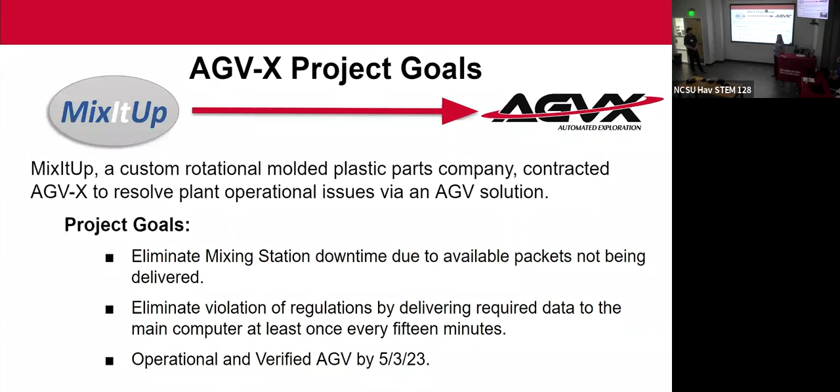And if you reviewed it and everything and you have certain questions relating to specific ones, just let us know. So now I'll just pass it off to Luke. I didn't mean to steal your thunder. Yeah, good job rolling with it. I've been in your spot many times, had to do that. It's always good to have it in case there's new people or whatever, and then be quick to jump. The seniors are talking about that right now because they've got some new people at their design next week.

Very good. So what we'll show you first then is a comparison of the design we presented at concept on the left, and then the design that we have now with our modifications and updates. The width is the same, the length is the same. We had a slight height increase, but the layout is all the same between the two.

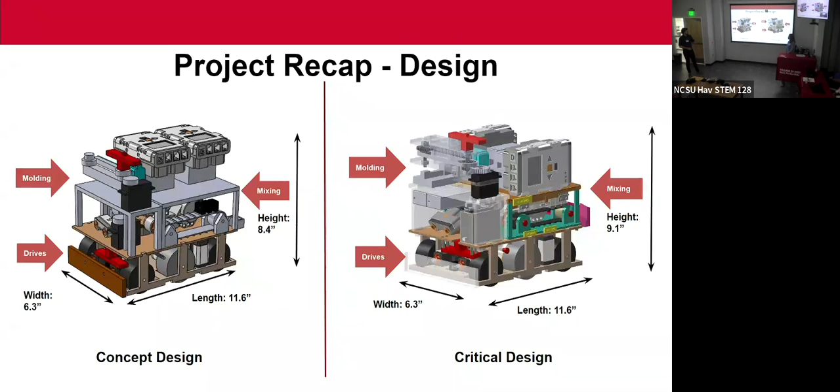I think one major change that you can see was just orienting some of the stuff on top a little bit differently. It helped with some weight distribution and cable management. Still within the overall height requirement. Yes, sir. And we'll cover all the changes that we made in detail as we go through the presentation.

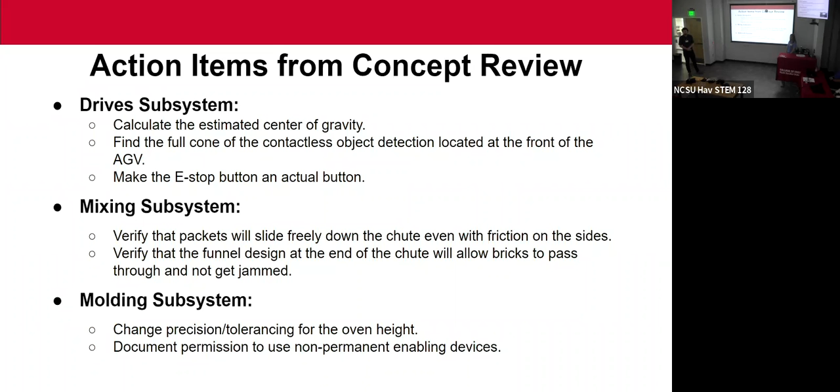These are the action items that we took from your concerns from concept. We allocated those to our subsystems, and as we go through our subsystem designs, we'll address how we implemented changes to address these concerns. Did we miss any action items that you can think of? Very good. So I'm going to hand it over to the drive subsystem, and they will explain their design. Thank you, Luke.

My name is Nicholas Conner. With me, I have Gavin Ehrhart and Bethany Lier. We are the drive subsystem. Our need statement was that we should provide a method of safely maneuvering the AGV around the plant, which would allow for the other subsystems to perform their required tasks. This is an overview of our subsystem and the components we used.

On the front here, there are two LEGO touch sensors. This is part of our secondary object detection with the bumper. We also have another touch sensor located right here, that is our emergency stop button. As y'all requested last time, we have added a button onto the end of that so that we don't have a rod that might injure any users.

For part of our primary object detection, we have the Sumo eyes located right here, the red object. Combined with that, we have the LEGO ultrasonic sensor on top. Gavin will cover why we have two of those, but those are primary object detection.

On the back left side, this component right here, that is our HiTechnic color sensor. This is used in identifying all the different cells around the plant. We also use it in the mixing cell to notify the code when we need to stop for the positioning.

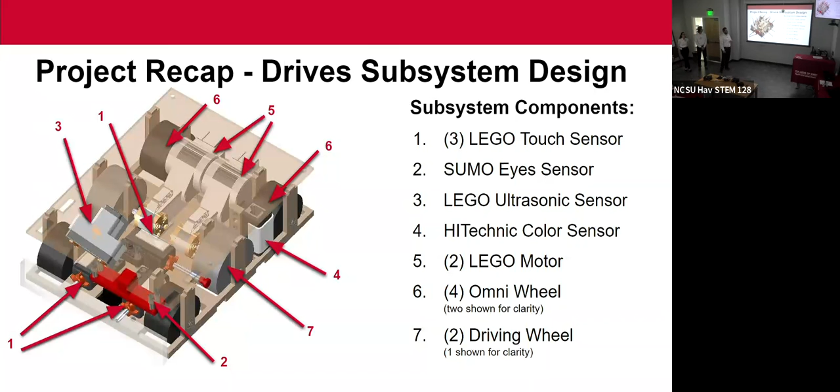Is that the wheel right there? Yes, sir. This one, if anybody wants to look at it. And then, as I stated, we have our two drive wheels, which are located in the center of the AGV in line with those motors.

Recap from our concept review, a couple of things I wanted to point out. For our main driving feature, we were working with the layered base design. With that, we wanted to allow for easy physical interface between the different subsystems. We wanted to lower our center of gravity, so get as much of our weight as we could down to the ground, and give as much height as we could to the other subsystems.

Going into this, we knew that mixing had a height requirement of 4 inches for loading their packets, so we wanted to compact our subsystem as much as we could to give them as much room as they need. The central pivot wheels in the center are our drive wheels. Having that allows us to rotate the AGV off the center of the entire AGV and allows better access to both the front and rear of the AGV.

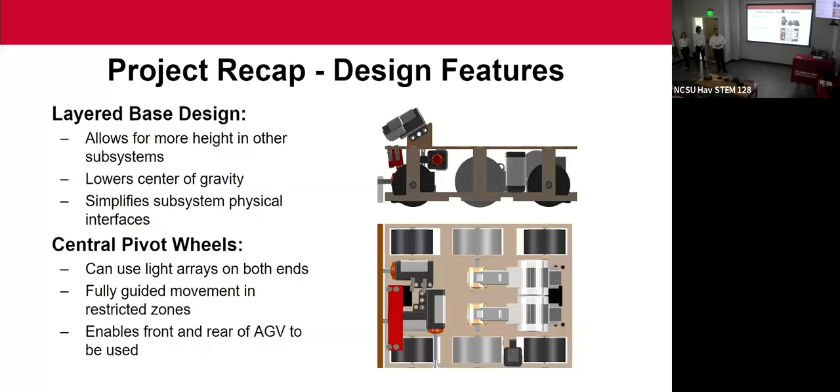From concept review, you wanted the button on that shaft, which I pointed out. There was also the center of gravity analysis and the object detection cones that we did not have fully defined, so we had to find those. Gavin will talk about that in just a minute.

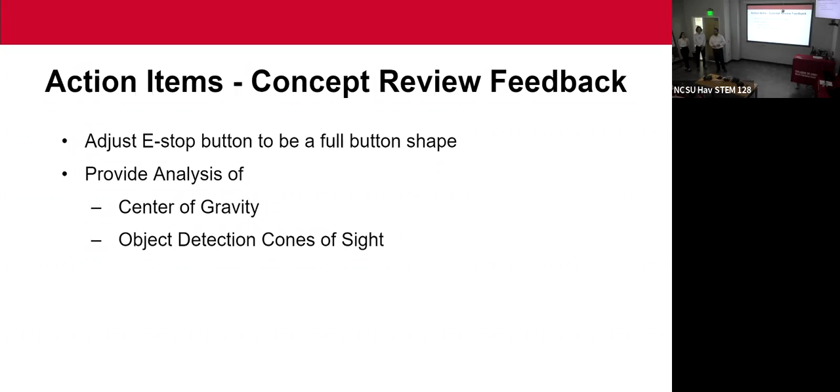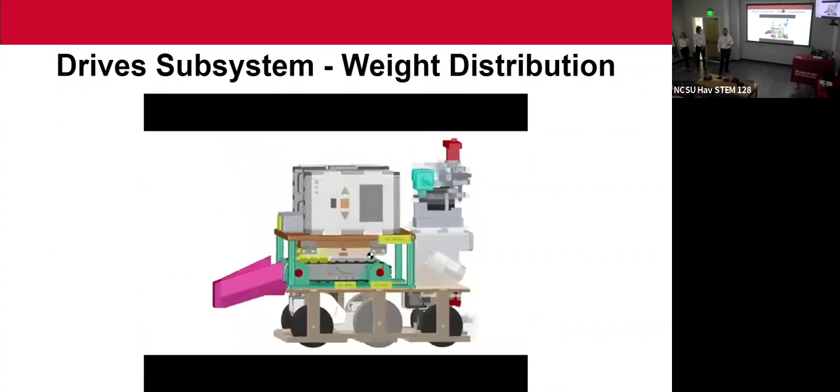Some details we wanted to point out here: between our two components, we have the main base, which is the lower portion, and the vertical components. On the top, this is what we reference as the top plate. In between those, we have a height of 1.84 inches, and all of our components, except the one you see sitting on top, fit inside of that space.

So how high does that make mixing their platform? 2.6 inches from the ground to the very top plate, so they had the rest of that up to 4 inches to work with.

Our subsystem, we have estimated the weight to be 1.1 kilograms, and we will cover later in the slides the allocation of the entire weight that was in our requirements, and we are within what we were allocated for that. For our components, we have 3 that were manufactured here, the rest were purchased parts.

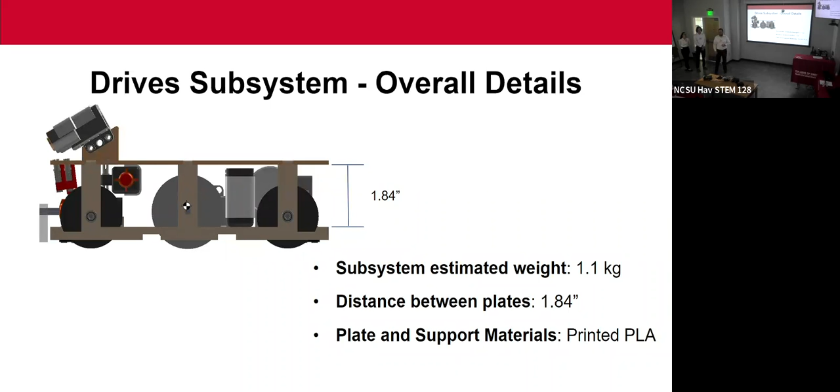As I stated, the base and the top plate are manufactured. We 3D printed those out of PLA material, and we chose to 3D print them due to the complexity of their features. And on the front, right here is our bumper, and Gavin will cover that in his portion.

Here we have our base details and their methods of attachment to allow the molding and mixing subsystems to interface with our AGV. Our team designed the top plate right here that will fit and lock on to the legs protruding from the bottom base structure. They will fit into each of these holes with a tight tolerance.

Here, like Nick said before, is our omnidirectional wheels at each of the corners. They are attached to the base structure with a shaft and bearings in their supports. This helps because the shafts do not grind against the wheels when weight is put on top of the AGV from the mixing or other subsystems.

In the middle, again, is our drive wheels, which are connected to the motors right here in the middle and the outside structure of our base. Again, you use bearings there so that the shafts and axles won't run against the wheel when more weight's on top. Our motors and sensors are all attached to the bottom base except for our primary object detection sensors and our E-stop, which I will show in a minute.

The dimensions, the bottom of the lower plate to the ground is 0.26 inches. And as you can see over here, from each side of our AGV, the center line is 3.15 inches.

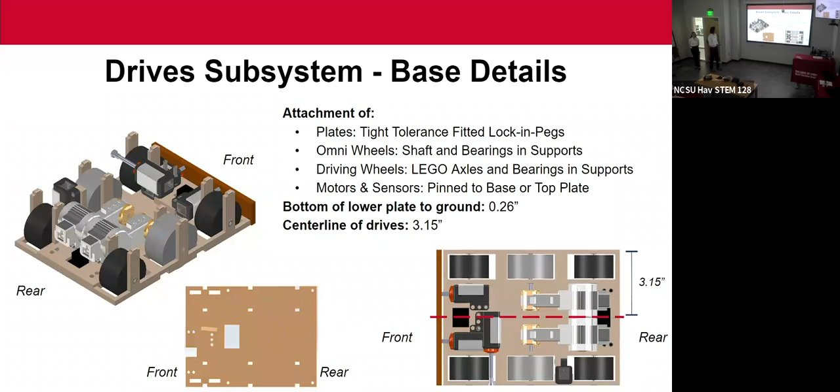Based on the feedback from our last review, you all wanted to see a side view of the cones of detection for our primary object detection sensors. Here on the top you can see our Lego ultrasonic sensor, and beneath that is the sumo eyes, both attached to our top plate.

The requirement is to detect an object and come to a complete stop without contact within 3 inches. Through testing, we found that if the sensors were only pointing straight ahead, they would not pick up at 3 inches. So we had to adjust their angle: for the Lego ultrasonic, we adjusted 30 degrees, and for the sumo eyes, we adjusted 7.5 degrees down.

The attachments are fixed so we don't have to worry about checking and adjusting them throughout. Yes, sir. And as you can see, as part of the requirement too, it detects 3 inches, a quarter of an inch from the ground.

Next, we have our top view of the cones of detection. Here in red, you can see our sumo eyes, and in white or gray, you can see the ultrasonic. Measuring the cone of detection through testing, the sumo eyes can only cover 5.75 inches, whereas the width of our AGV is 6.3 inches.

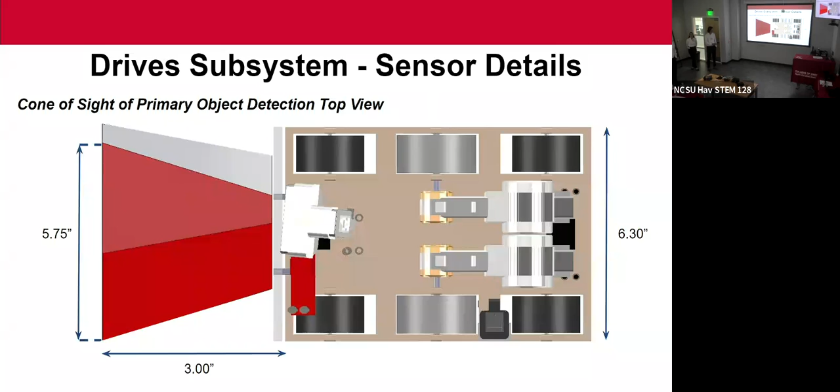Go back to the previous slide. So there was no way to put that sumo sensor where you can actually get to it.

The other problem I see here is the minimum requirement was 3 inches. You never want to unnecessarily force yourself into a minimum requirement. If you can cover beyond 3 inches this way, you want to do that. Right now what you're showing me has pinpoint risk, because if anything is off in one direction, you're not going to meet the 3 inch requirement. You've got plenty of coverage based on the requirements, so I would have pulled that back and said we're covering beyond the 3 inch minimum requirement, so if things move around, we're still covered.

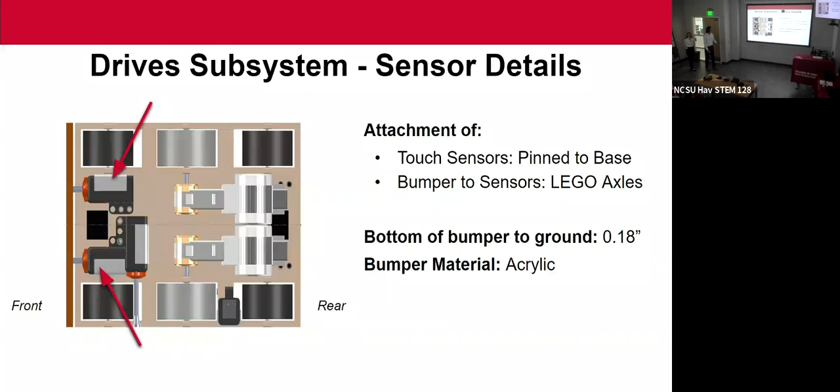And next, I'll be passing the code logic off to Beth.

For the code logic, I'm going to go over a general overview of the whole code altogether, and then I'm going to get a bit more specific into how the entering and exiting of the cell works with a bit of a walkthrough. We do have the pseudocode in the background slides if we had any specific pseudocode we wanted to look at in particular.

So when we turn on the AGV, it'll start by setting up all the sensors and setting our variables to 0. Then we'll message Brick 2 to make sure they're ready to start their day. Then we'll have the prompt for the operator to ask if we're allowed to begin motion. After we get the okay to move, we'll exit the cell and begin following the line, which starts our follow-the-line loop at a set motor speed.

As we go through the loop, we're going to be checking the sensors in a particular order, running it constantly while we're in motion. First, we're checking for an object with either primary or secondary object detection. If either of those is flagged as registering an object, we will stop and do whatever is in the function called for checking the object. For the e-stop, it's the same thing; we'll check if it's been pressed and do whatever runs in there.

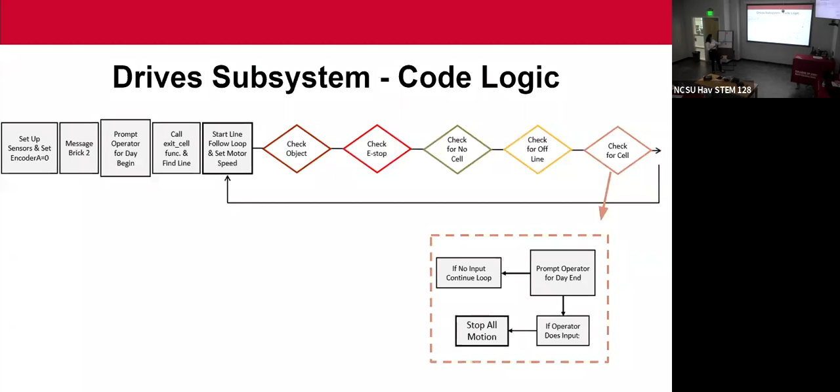Well, it's good, here I could transition into that, a little bit of a walkthrough of how we plan to get in and out of the cells. So I have my AGV model, this is a scale model of our AGV. This is gonna be the front half and the back half. Light array 1 is gonna be the one in the front, and light array 2 is gonna be the one in the back. Those are the references I'll use.

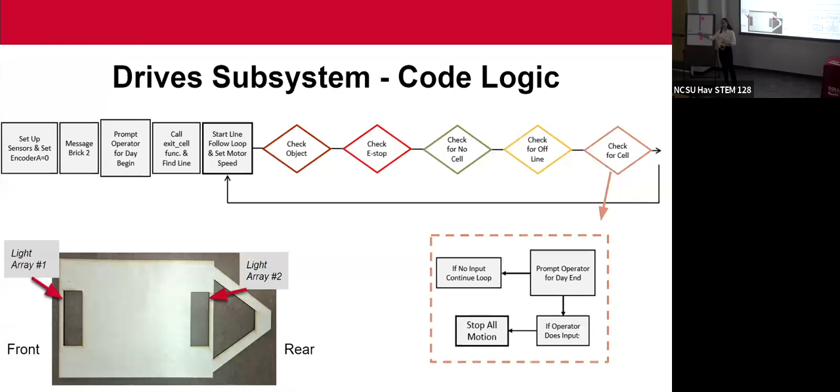So the reason we really wanted to utilize the pivot wheels when turning into the cell is because it would make it really easy to center ourselves if we could pivot easily. So that's why we took a lot of time thinking about how to get in and out of the cell, the enter and exit functions. We also only wanted one function for entering and exiting that changes based on what direction we wanted to go. So as we're coming into the cell, these are the dimensions, this is the restricted section and the aisle. These are figure 2 in the ICD if you wanted to see the actual dimensions. It should be to scale with our AGV box thing that we have.

So as we drive in, the color sensor that is approximately here will see this color space, and it should be lined up with this line. Our center wheels should be lined up with that line. And when it determines whatever direction we need to go based on the color—for example, if we are at the molding or data color—we are going to turn forwards. So we slowly turn until light array 1 is no longer on the line, then go just a little bit further so it's really not on the line. Then we continue turning in that direction and stop when it sees the top line. Then it slowly centers itself and pulls forward until the bumper hits the cell wall of either the molding or the data.

If we're backing in, we'll do the same thing but with light array 2, turning the other direction. So slowly come around until we're off the line, come back around until we get to this line, then back in until the color sensor at the mixing cell is indicated, and then we should be lined up so anybody could do any servicing they need to do at their cell.

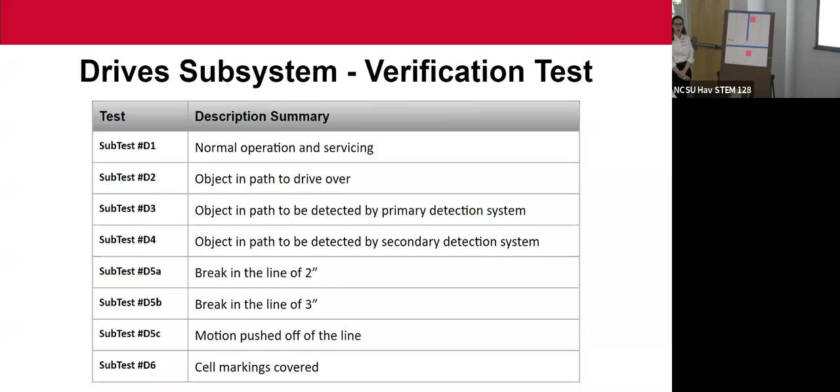If that's all the questions for drives, we're gonna go ahead and pass it off to the mixing subsystem.

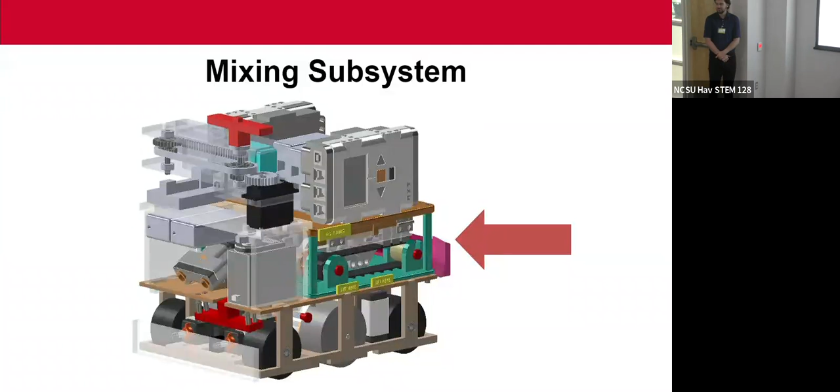Okay, we are the mixing subsystem, already met. And then we have Matt, of course, our subsystem team lead. We have defined our need statement: the mixing subsystem will receive, store, and deliver packets in such a manner that the available packets being delivered to the zone never run out. Here is a view of our subsystem on the whole AGV body.

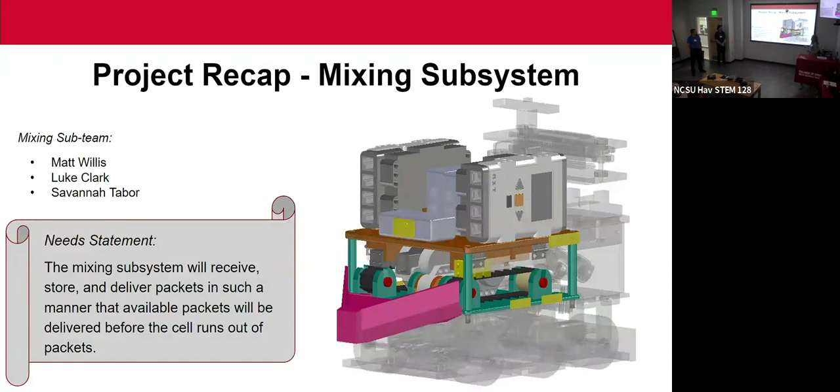I'm gonna go through a project recap from the concept design review. This should be a familiar image, and here's our components here.

From concept review, we took down some action items. You all had a concern about our chute and whether those packets would freely maneuver down the chute without any interference with friction. Also glancing back to our concept design, we had a funnel that was really tight spaced, and there was a concern of whether the packets would end up getting jammed through there.

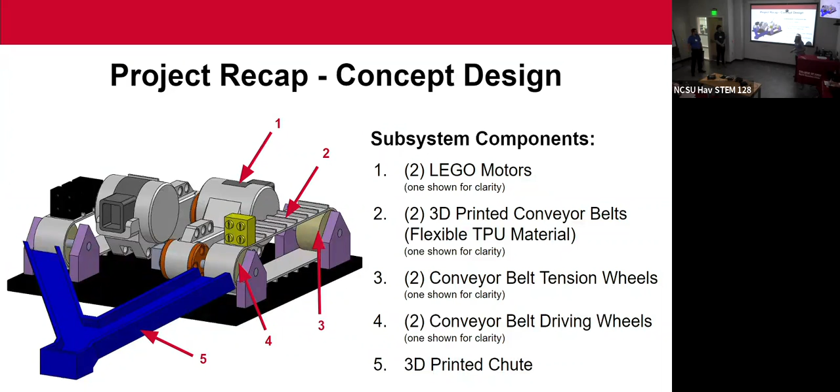Internally, we took action items as well: number one, to clear up the redesign of the packet chute, and number two, to finish defining our design of how we stabilize our packets on top of our conveyor belt design. We also needed to finish defining and designing our base and structure, and how we were attaching the bricks and hardware on top of our subsystem.

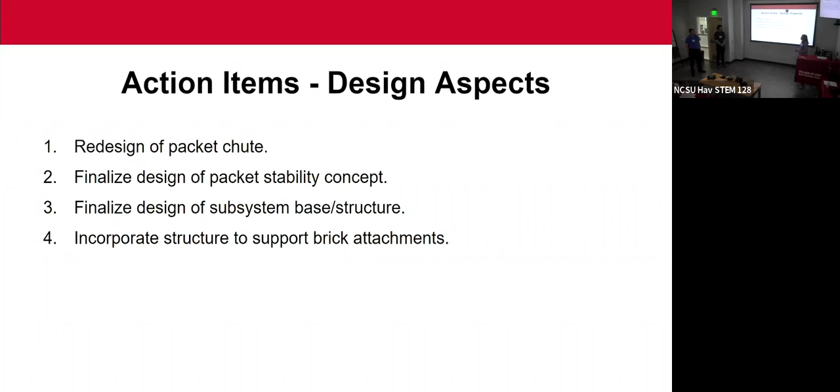So I'll start with a big picture, breaking through components of our design, and then Luke is going to go over our design improvements and different accomplishments.

In the green, you can see our base and structure is slightly changed from concept review. We are still using the 2 Lego motors, and those will power our 2 conveyor belt systems. We are still using a 3D printed conveyor belt out of a flexible TPU material. We are doing 3D printed conveyor belt tension wheels, and we have our conveyor belt drive wheels, which are hidden in this view behind the conveyor belt. We're also using alignment pins to help us attach our conveyor belt system onto the base.

Here's our newly designed chute. Luke's going to go over those changes. And we are also using Lego connector pins to help us assemble onto the platform which Drives discussed to you about.

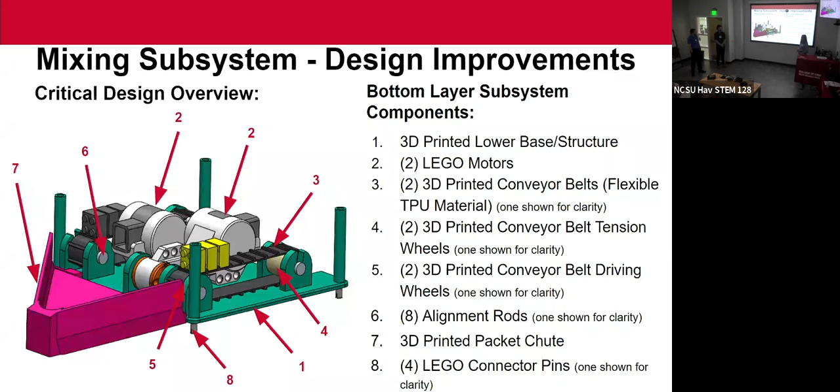Adding on to that bottom layer, we have our top layer, seen here. And that is because mixing has took over the responsibility of the attachment of the hardware for the AGV, such as the bricks and the SMUXes that drives are using, and a battery pack.

With that top level design, we have designed a packet stability here, which is composed of acrylic doors, a hinge mechanism, and a latch. Luke's going to get into the details of that as well.

We are using those same Lego connector pins as we did down here to attach the top level to our bottom level, and of course the hardware on top. And if you look at the yellow placards here, we have also taken the responsibility of the ANSI labeling for the requirements.

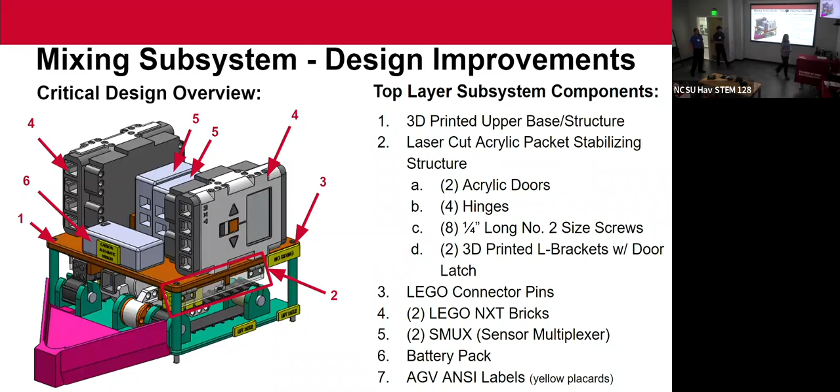And now, if you would pull up the CAD model, and I'm going to pass it to Luke. Just going to give you an overview as he pulls this in, a 360 view of what we've got going in our design.

So like we discussed, the bricks are still facing outward for the operator interface. That was one of our requirements. Okay, hold, go back, Nick. I want to see, keep going. I want to see how you're holding the bricks in. Oh yes, and I've got some more pictures that I can show you about that.

So the stuff on the top is fastened in a couple different ways. The bricks have to be easily removable, so we use Lego pins to attach those. The requirement was that the batteries on the NXT need to be changed in under 3 minutes. So we accomplished that by making it easily removable, so you can change those batteries. Thank you, Nicholas. Okay, go back to the presentation now.

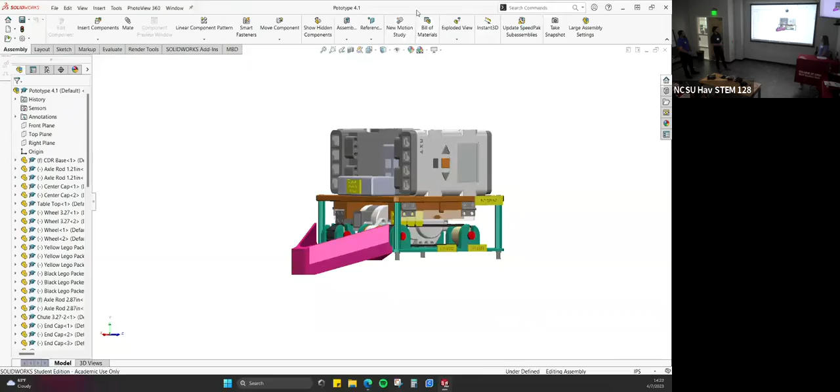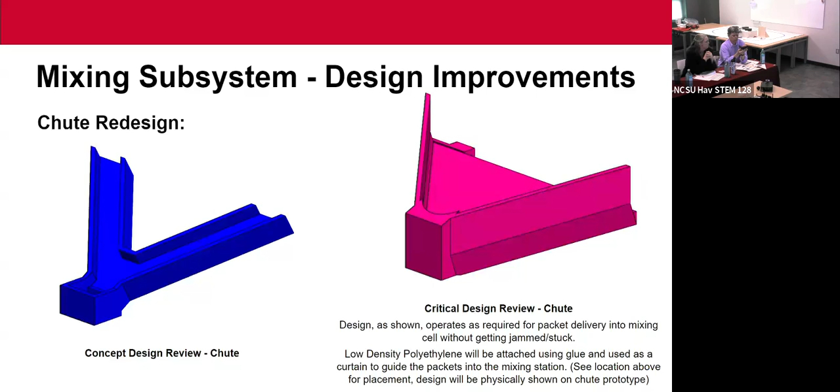So we opened up all that space to reduce the walls so the bricks would not get jammed up in the chute portion. One concern that we had as we started to test was that the bricks would just land on the 2-inch square and bounce off. So the plastic sheets that you see taped on the front will prevent the bricks from popping out toward the front or the side. In the actual mixing cell, there is a back wall and a plunger on the left, so that covers the 4 sides. So that's how we handle that concern.

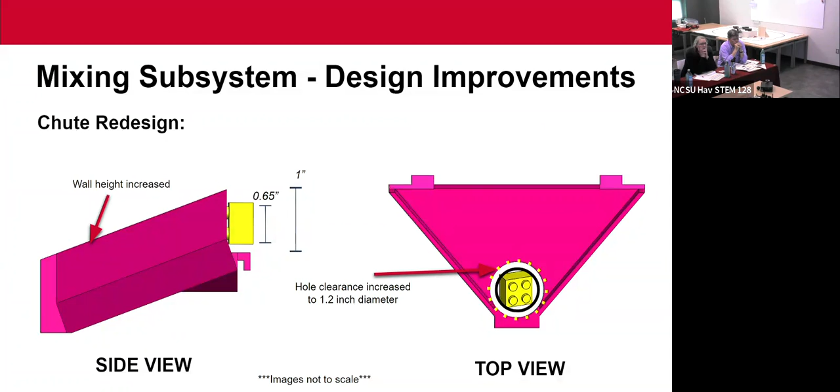Another concern was that the wall height was just not quite tall enough on the last chute, and so we raised that to 1 inch. A brick is 0.65 inches tall. We increased the hole as shown here to accommodate the longest dimension of a brick, which is 1 inch, and the hole clearance is 1.2 inches. So a brick can freely pass through in any orientation.

The other thing you'll see on the chute is the 2 slots. You can see them well here in the side view. And those just slide into the slots we'll have. This is a prototype, we'll have slots there, and it makes for easy assembly or disassembly. So when you lift it on the fork truck, you can take that chute off the back and decrease the width so you could fit it in a tighter space if need be.

And as Savannah addressed, we've got the top plate, which provides packet stability on the top and insides, and then the acrylic door is on the outside. So when the operator needs to refill the packets, they can simply lift up the door, and it's got a clip attachment, which I'll have Nicholas pull up here, and I'll show you a little closer.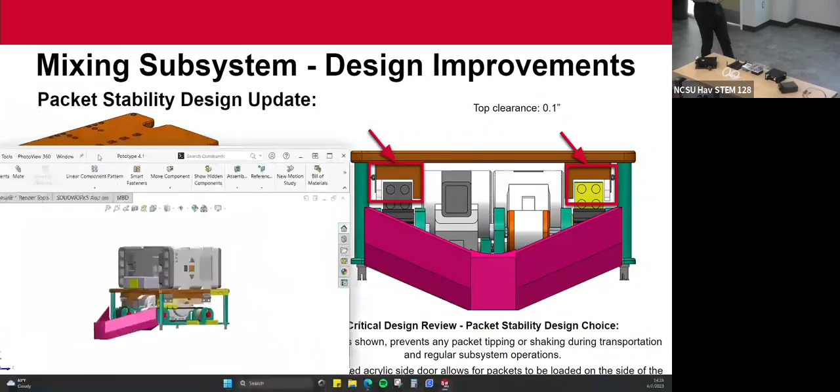So as the door swings up, this handle fits over this attachment here, and it's got the tab, so it'll clip in, and when the operator is done filling, they simply pull the tab back and lower the door.

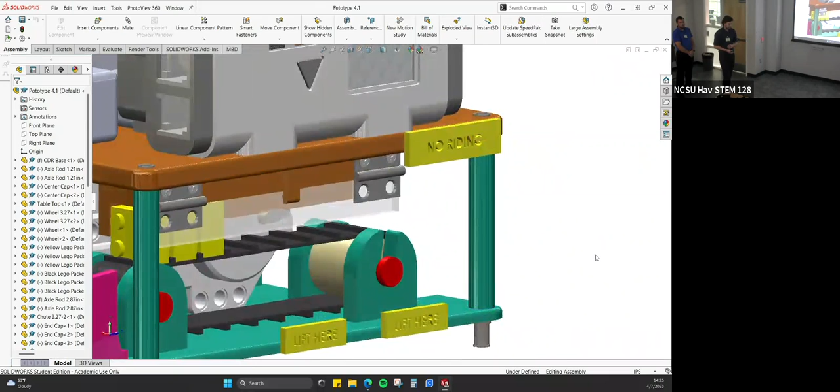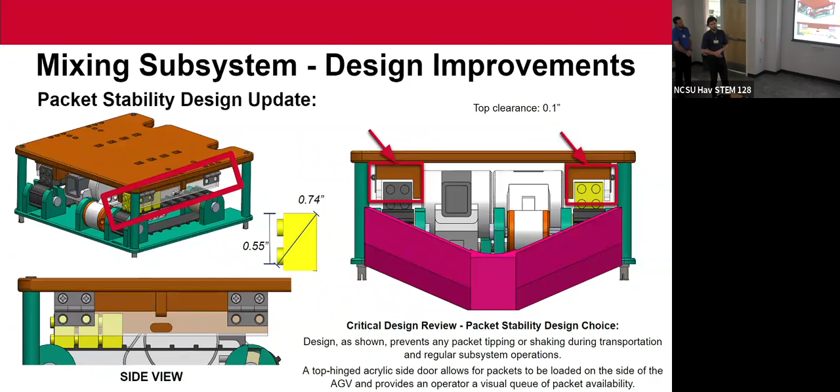So the top clearance between that ceiling and the brick is 0.1 inches. What I've shown here is if a brick needed to tip over forward, it would have to go through a gap of 0.2 inches, so that's covered. Over backward, I forgot to put the picture in, but the distance would be 0.15, so that's also covered in that clearance. On this prototype, you can see the clearance between the bricks and the ceiling, so even when you tip it forward and backward, they have nowhere to go. We did not have the doors on this, but there is the inner wall and the top ceiling.

So the other thing is this base assembly that we've got. This holds the 2 conveyor belts, and the motors can mount in the middle here. The interesting thing with this is when you need to disassemble, all you need to do is pop the conveyor belt out like this. We've got the angled slot there, so that makes for quick and simple assembly and disassembly.

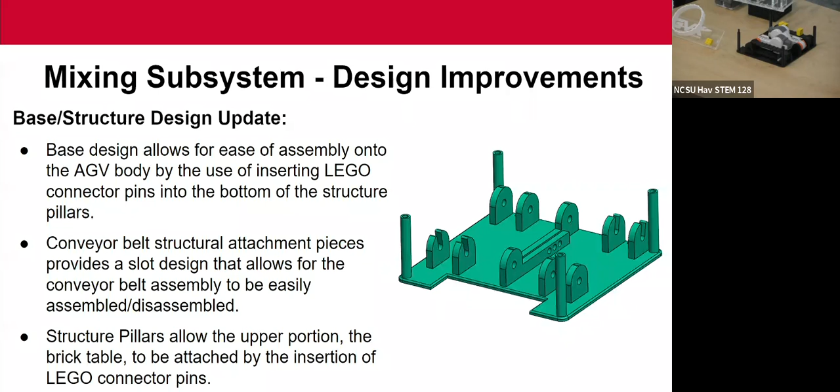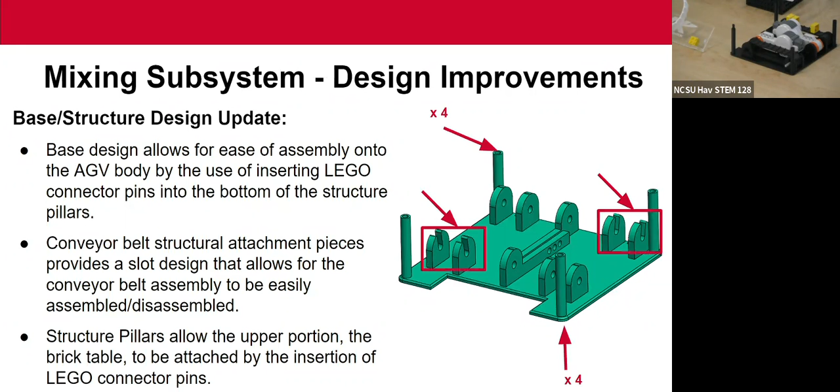The pillars you see on the corners have holes in both the top and the bottom. For the bottom, we'll be attaching to the AGV, and for the top, we'll have the plate, as I just took off there. And then the slots, as we discussed already.

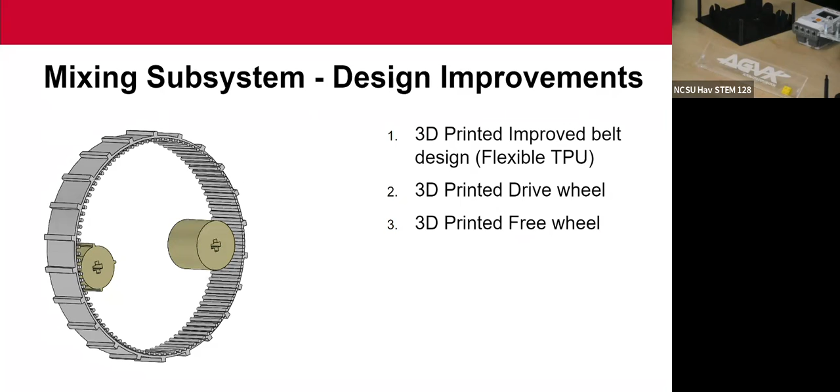We went through various iterations of our belt in testing, so we came upon this, which is very close to our final design. You all held this last time, and we came upon the desired thickness that gave us the performance we needed and our slot width. We designed that so the slot width would actually hold the brick, which helps with the stability as well - it grips it in. And then our wheels, we designed to fit with those as well.

So you increased the thickness, or you did not increase it? We increased it very slightly from the last design. We actually went slightly skinnier to see, but we realized we didn't need that skinniness anyway, and the thickness provided a little more durability.

So the tight tolerance is in there between the belt guides and the back wall, the top wall, and the acrylic cover.

Any concerns about loading the bricks? We have had no concerns with loading them. With this prototype, we were able to see how easy or difficult it was to put them in, and we didn't find any challenge with the loading of that. So there's no way to get them too far in and jam up against the wall, or not that we found out.

These packets, we found when we were touching them, they're pretty rigid. Yeah, I don't know if you could really break that open at all.

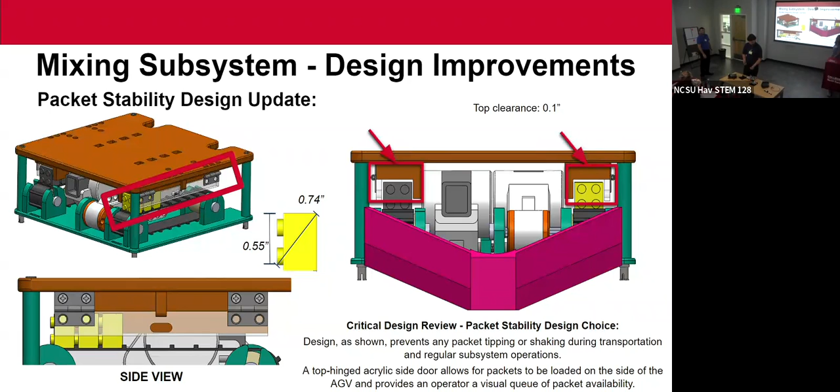And I'm notorious for calling them bricks because they're Lego bricks. Every time we practiced, they said, call them packets - they're packets. And I just kept saying bricks, so if I say that, that's why. I just can't get it out of my head.

So the other thing Savannah was talking about was the brick attachment on the top. This is our top plate. We've got the holes for Lego pins that match the shape of the brick, so this enables us to take them off and put them on very easily.

And the ANSI labels, we showed those here. We needed to label the forklift points. We needed to say that we are an automatic vehicle, and we needed to have no riding signs on two opposing sides of the vehicle, so we chose the right and left side for those.

Any questions so far?

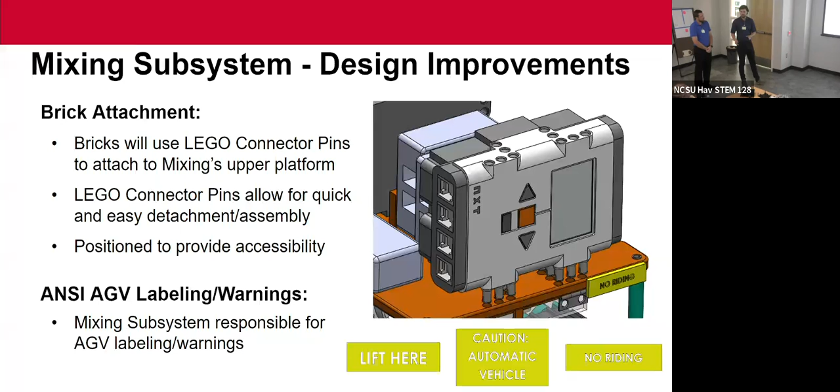So I'm going to hand it over to Matt. He's going to discuss some of the prototyping we did.

Yep, so once we had our design, we built this prototype you see there out of acrylic. And we did use the 3D printer to do the wheels and the belt. We created just the generic code so that we can see how it looks when it's dropping bricks and kind of understand if we were going to have any issues from that point.

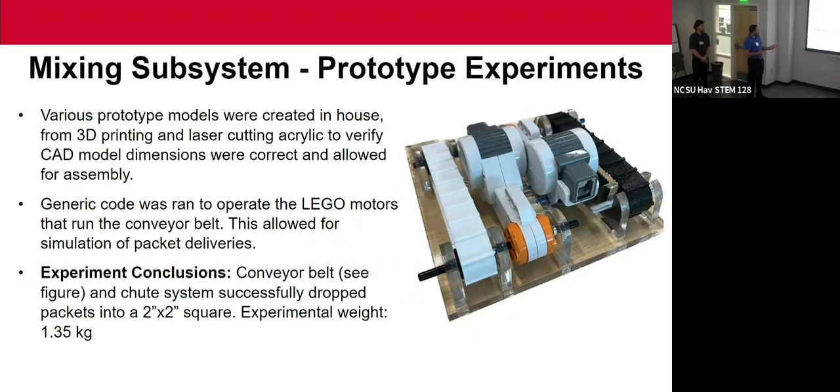Through that testing, we found that we could successfully drop them in the 2x2 square, and our experimental weight was 1.35 kilograms. This is going to show that test that we did. Also, in between each packet being dropped - I'll go over this a little bit later - there is a 3-second pause, so that the first one can clear out of the way.

That was your first test? Yeah. Were you scared that black one was gonna fall when you didn't want it to? Yeah, we did. But we have that angle down now. We did an arc length formula, found out exactly with our belt thickness and everything what it needed to be. It's 72 degrees that it needs to turn to drop one, and I think when we tested this, it was at 70.

So eventually it would have dropped 2 or missed 1. But yeah, now I ran the other day 16 on each side back to back, and it lined up perfectly every time. You guys did testing that showed you were gonna need this - is this what kept you in the 2x2? Exactly. Yeah, when we dropped them before without that, some of them would land where they were supposed to, but most of them would bounce and travel a distance of an inch or 2.

That, we can use on there now. Can you show your - go back to, I think in this one we already had that on there. Yeah, you do. Watch, play again.

Don't know how the 18-wheelers drive down the road, but you see what their little flaps look like? Yes.

I have to plan for making sure I'm using that. We considered it a good alternative because we have to back up. We've got this 1.5-inch wall, so we wanted to get the chute as low as possible and yet have that stability. So having this flexible material, it passes freely over there, and yet we can still have that control of where the packets go. So understandably, it will be a maintenance thing over time, but we considered it a good alternative.

So we'll go through some of the design logic, how our system's going to work. Originally, the first brick, brick 1, is going to send out a message that it's made it to the mixing cell. That's going to go over into the molding function. The molding function is the main one on brick 2. Our mixing function is kind of nested inside of that. So once molding receives that message, it's going to call on the mixing function.

The mixing is going to request the packet recipe from the mixing computer. It's going to acknowledge that message and wait 5 seconds before sending the packet recipe back. The mixing function will then acknowledge that they received it, and it's going to start the process of delivering those packets. First, it's going to recognize how many packets of each color it needs for the batch.

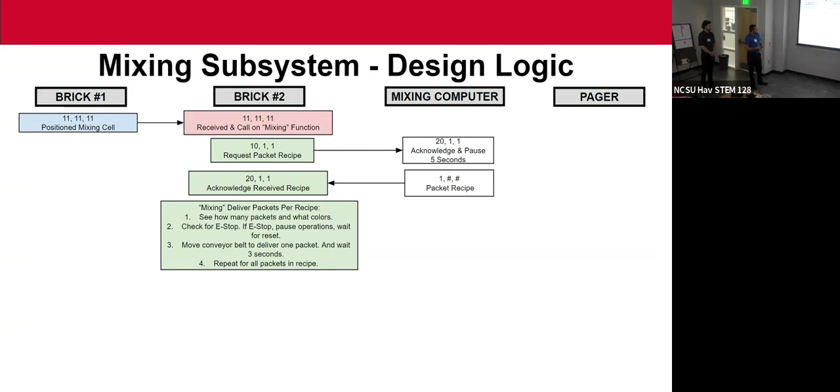It'll deliver a packet, wait 3 seconds for it to get cleared out of the way. It's going to repeat that until all the packets are done in that recipe, and then it's going to globally store that so it can be delivered to the data computer later.

After it does each batch, it's going to determine if more packets are needed. If there's less than 2, it's going to page the operator, and it will wait for them to fill it. Once they've filled it, they have to press a button for it to resume. Once they've pressed that button, it then exits out the mixing function back to molding, who then sends a message to the drive's computer letting them know that mixing is done and they can continue operation.

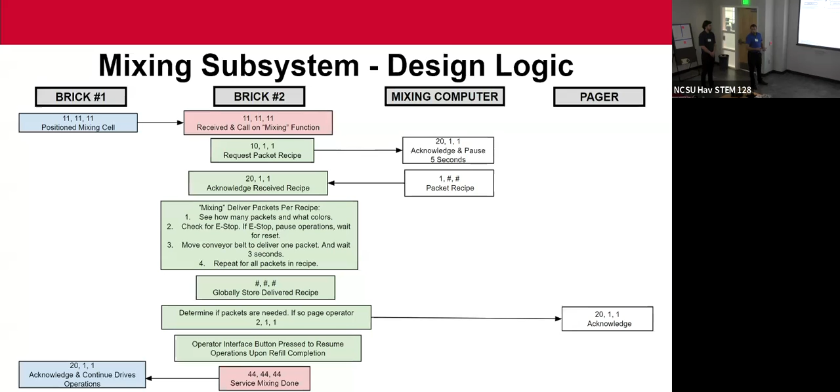And this is our verification test, which like we said before was in this documentation. Basically, we're just going to run through scenarios with normal operations. We're going to simulate getting a message, simulate sending a message, run through different batches of different numbers. We even have one where there's actually 0 for that batch because that is a possible scenario. And we will be pressing the e-stop button randomly just to make sure that it will actually stop when it's supposed to. Do we have any additional questions about the verification test at this point?

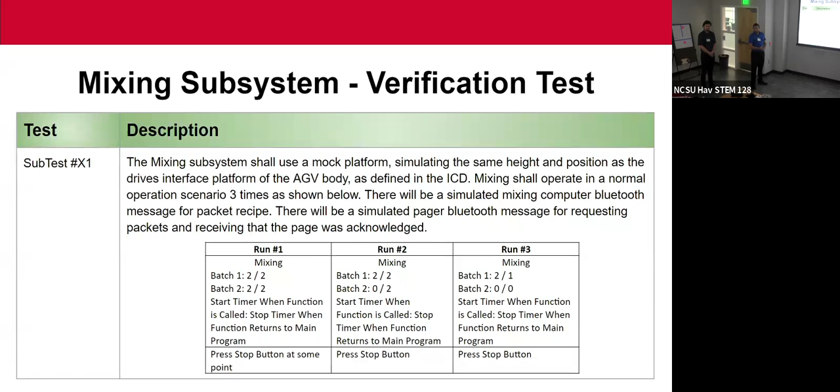And now we're going to switch over to the molding system.

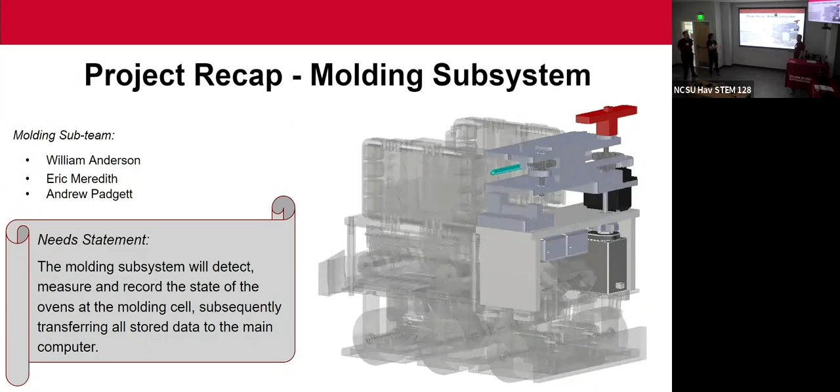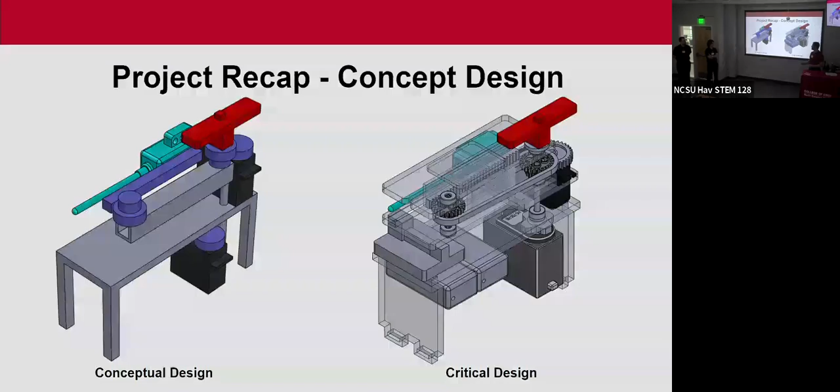We did take a couple action items. The first one was the precision tolerance for the height of the oven. That was on one of the slides in concept review, and we toleranced it to the 10,000th of an inch. Not realistic. Took a lot of heat for it. We rectified that with the ICD.

The second one was we didn't actually have documentation for permission to use our non-permanent enabling device. That was a handshake with the plant manager. We talked about it, but we never documented it. So that was a problem, and we corrected that in the ICD.

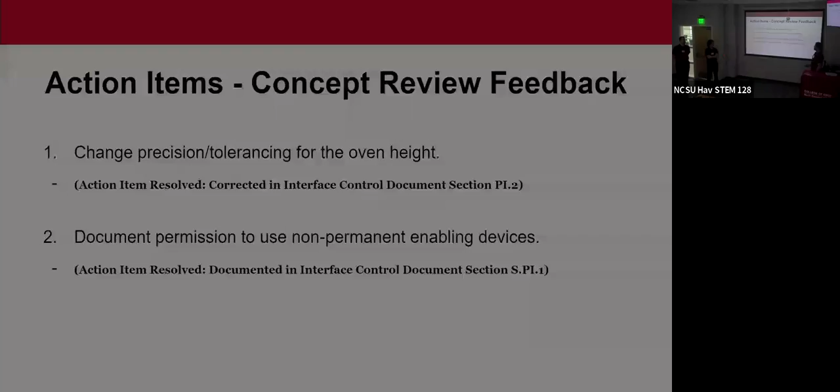Before we get into these details, we'd like to take you over to the table and just do a small demonstration.

So what you're going to see here is the last time our sumo eye turned around on the ovens. This time we want to show you our arm actually swinging out and inserting the thermometer. Hey Russell, can you move left just a little? I think I can actually get your demo on the recording. I got some really good videos of all this.

What's actually going to happen once I run our code, which we'll talk about later, is the arm is going to come to its stationary home position and then simulate going to oven 1. It's going to insert the probe. It's only going to pause briefly -- this is going to be quick, we're not actually trying to read temperatures right now. It's going to pause for a second, come back out. Before every big movement, you're going to hear an annoying sound saying, hey, get out of the way, something's moving. It's going to do the same thing for oven 2 and oven 3, and then come back to home.

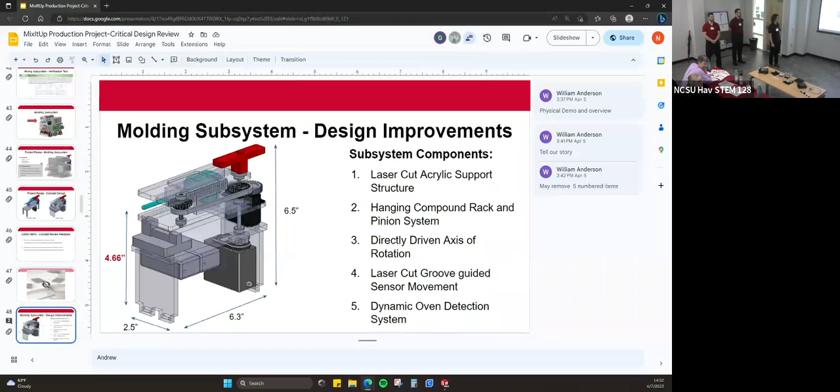Are they pneumatic wheels? Are those pneumatic, the wheels you've got in the center? In reality, the drive wheels? Yeah. Good answer.

All right, is there anything else you want to see on this one? You'll get a bunch of other views here in a second. Wow, I just want to take a moment on this. That's crazy, isn't it?

You talk about interactions between subsystems—what a cool idea, all this, but it's totally dependent on the tolerance of where you're getting things to make this really tight. In some systems there are certain points where you can't control tolerance anymore. Pneumatic tires, for instance—just the temperature in the building changes and your height may change an eighth of an inch, and that's well past your tolerances. So you may be spot on, but the whole system's moving up and down an eighth of an inch. On a cold day we're nailing it, on a hot day we're missing it by a mile. That's got to be considered in any systems design.

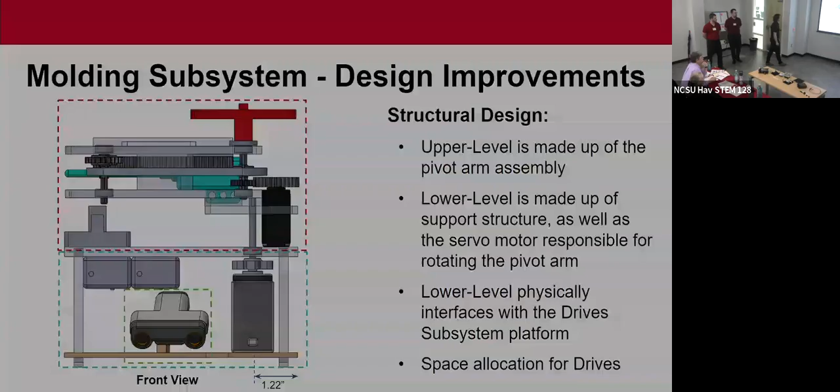Moving right in, our support structure is laser cut from acrylic, for tolerance and rapid prototyping reasons. This upper level has been lowered by 1.5 inches to achieve that height, but given this upper level dimension, we still needed this servo to be able to rotate over top of that platform without interference, in order to create this balanced beam that allows us to do this extension.

This layered design allows us to sandwich the temperature sensor as well as the compound rack and gear system between these two layers of acrylic, and then seat bearings in each layer to create these frictionless axes of rotation.

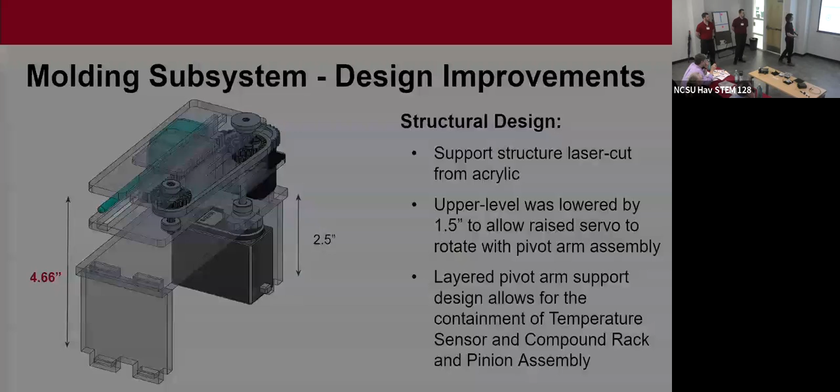Here on the upper level, we have a top view of this pivot arm. Talking about the grooves mentioned earlier—these were laser cut grooves, and the idea was we wanted uniaxial motion. We didn't want drop off. We wanted it to stay straight because the tolerances are so tight.

Highlighting this here, this is actually the lower plate in that two-layer system. This is the groove that the temperature sensor slides along as it interfaces—it connected perfectly with hardware that was already on the bottom of the temperature sensor.

Let me just say for you guys, don't go off and do a bunch more design work to make it flexible at this point. Demo what you have at the end; if you want to make some tweaks, it's really just not working, but don't go do a whole bunch of design work to give yourself more rigid flexibility. When it's fully extended, there is, I'd say ballpark, probably a quarter inch of movement up and down, side to side.

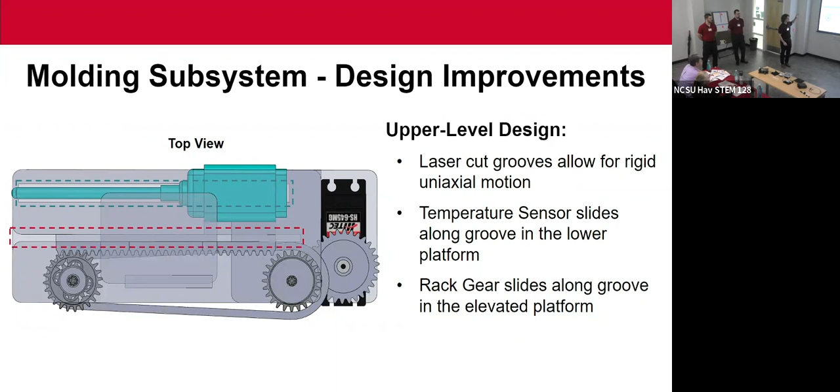The rack here is fixed to the top platform to allow dimensionally for enough movement, as well as keeping this and this to 6.3 inches. Initially, when we had this put together, this stuck out past the outside of the AGV, which wasn't okay. So in order to recess this further back, we had to invert the rack and pinion system so it sticks to the roof and we can slide over the top of this gear train effortlessly. In doing this, we also inverted the drivetrain in order to maintain the same gear ratio we discussed in concept review that allows us to accomplish that distance. Any questions on that?

Looking from the other side, this is the sumo eye we've demonstrated, looking at the different ovens. It's placed upon a rotating platform, actually on this axis of rotation. So we're taking advantage of rotational movement that's already in play, basically code that's already written, space that isn't being used. This allows for weight and space conservation, and at the end of the day it allows for accurate detection of each oven, since we're literally pointing it where we're looking, there's only one thing in the field of view at a time, so the consistency is going to be a lot higher.

So when we arrive at the cell, the first thing you have to do is determine which ovens are present and then service those ovens. So when we get there, this sumo eye is going to rotate and look at all three ovens.

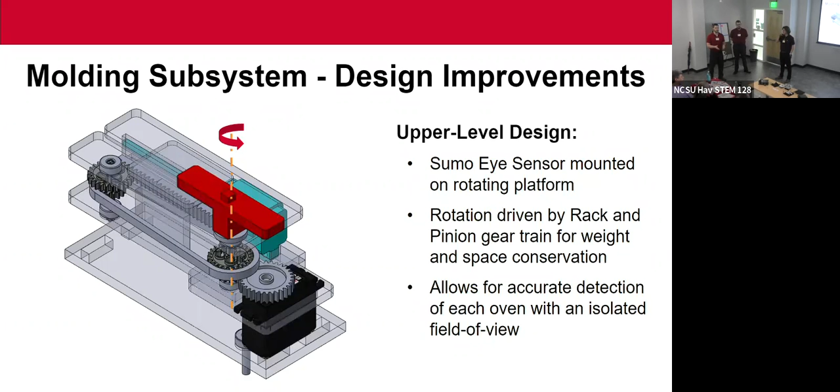Moving on to the lower level that I distinguished earlier, we switched to a direct drive. We did this in order to eliminate unwanted forces and conserve space, as this ended up getting allocated to the drives team. So we needed this in perfect alignment with the AGV in order to allow that space, as well as, previously, when it was situated here, it was driving it from the side, which was creating a moment and wanting to move that axle, which over time would have caused unwanted damage to the vehicle.

Let me throw something out here, call it a timeout. Remember, you're in critical design review. You're trying to demonstrate to the panel that you have a design with low risk, that is very repeatable, and that we shouldn't be worried about going to production. So every time you start telling me how precisely this needs to be aligned, without me asking, you're introducing a sense of anxiety for a systems engineer that's going to accept this design.

So keep in mind, your objective is not necessarily to tell us all the great and wonderful precision decisions you've made to get this to work. Even though that's cool stuff, your job is to make us feel comfortable that this is a very viable system and that I should have no concerns that it's ever going to be a problem to operate or maintain.

Dude, to be fair, I was told, when I told you, I was told to tell you every cool thing and challenge. Listen, we come here with one point in mind, and that is to make sure we point out anything. You cannot win for losing with us. We were told to tell you every challenge. All right, I did tell you that. Yeah, literally, it was Bill's fault. I had a whole slide. Everything is my fault. All right.

Gladly, Eric's going to talk about our non-permanent enabling device. He designed a 3D printed funnel made out of PLA to be able to guide the temperature sensor into the oven consistently. As you said before, that is an inch in diameter with two different angles. The outer angle is 30 degrees, and the inner angle is 12.

The funnel will rest on the oven here and around the folding arm on this side. Because it's in direct contact with the metal in the oven, we wanted to make sure that it wouldn't melt while the ovens were running. So we researched the melting point of PLA and found it to be 302 degrees Fahrenheit.

And the max possible temperature of the oven is 250 degrees Fahrenheit. We extended the top of the funnel so that it acts as a reflective surface for the Sumo Eye oven detection.

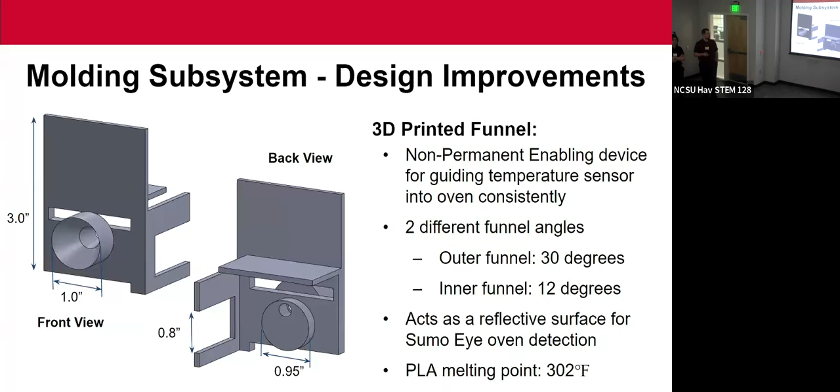I'll pass it off to Will to talk about the brick 2 design logic. Thanks, Eric. Like Luke said earlier, and the other teams mentioned, there are 2 bricks. One brick we're in charge of, and the other brick Strive is in charge of.

It's a perfect time to bring up that we did this E-stop design. So let me ask you a question: you're telling me you've got a watchdog routine for your e-stop, but these guys have actually encoded the e-stop check at different segments in their code. Why the 2 different approaches?

Okay, so drives is a loop. It's a loop that continuously goes, and they check all of their sensors, including the e-stop. So that happens very fast. The thing about brick 2 is that we have several very specific functions. It does what it does when it's at each cell.

Gotcha, that's a good point. So you have to have your own separate loop watchdog kind of. Correct, with a global variable. So what I was going to bring up is this e-stop, imagine a little button. When it's pressed, it sends one signal to 2 separate bricks. It does work, it's really awesome.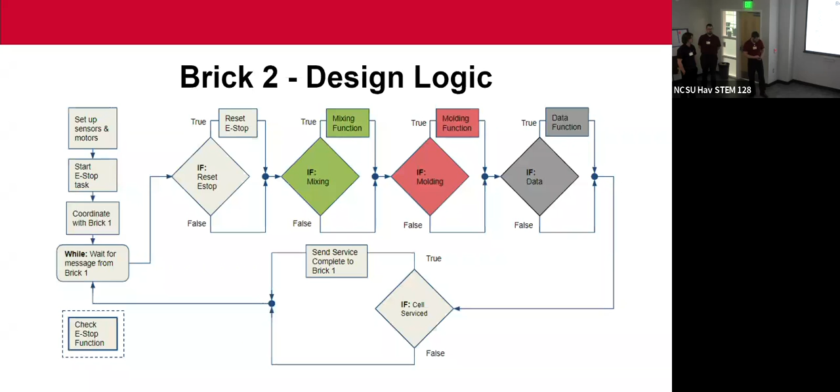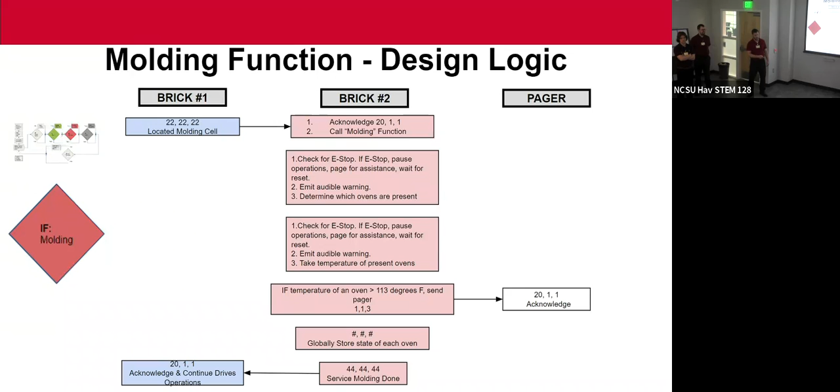Okay, no further questions. We do have a slide for the molding and data function. Would you like me to walk you through what they're going to do at each cell? Okay. You guys want to see it? I think so, I'm good. Alright, and again, the data cell.

And then we're going to run verification tests. We're going to change whether ovens are present, so we can check whether they're not. And we're going to vary the temperatures so that according to the ICD, we can store the proper state of the ovens and transmit that out, including an over temperature situation. We're also going to press the emergency stop button at some point during our tests to make sure it actually works.

So the only thing I don't see, did you have another set of tests to do? No, sir. So I don't see any part of this where you're varying your tolerance and your angles for those kind of things. So I would expect for you to, in addition to the various holding configurations, also look at some variation of being off kilter by some degree, plus or minus 5 degrees. Maybe you want to let this thing back in a couple of times and see how much variability you're getting, and then test beyond that a little bit.

Okay, so the ICD does give tolerances as far as what they're supposed to hit, but that's a good point. Plus or minus 3 degrees is what is in the ICD, but we never thought in our tests to include testing the tolerance limits. That's a very good point. Yeah, never thought of it. I didn't see the drives team test that either. That's going to be a critical part of this, and we would want to see the test that says so.

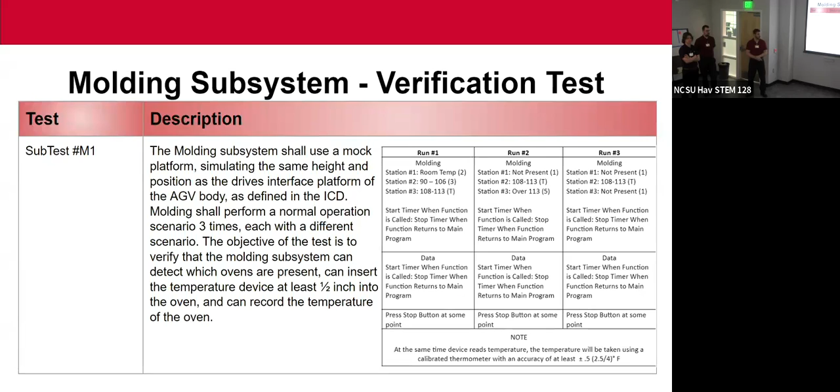Well, thank you. Any further questions or comments, concerns? Nope. Good stuff. So now the team leads are going to come up and talk about the subsystem interfaces.

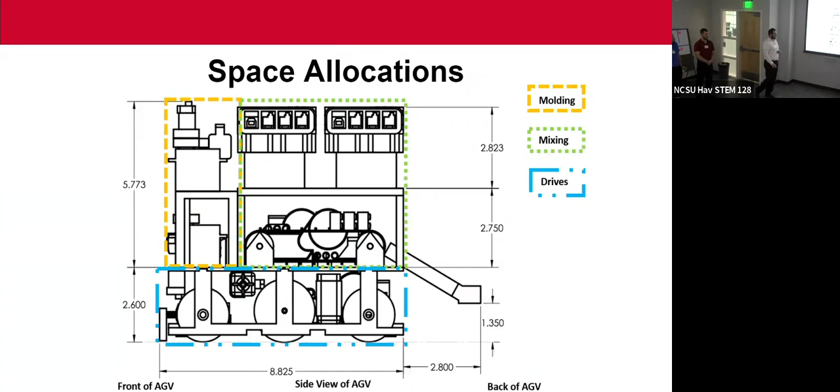We're going to go over the physical interfaces of the different subsystems. This is a side view of the AGV showing where those different subsystems will be located. As we see, drives is on the bottom here, right here. We have molding front and mixing encompassing the back half. We also have the top view showing volume mixing where they're going to be located now.

These are the ICD diagrams, right? These are in the ICD. Yeah, so here's your spot, Todd, when they get to them. Also in the ICD, as Andrew was mentioning when he was talking about his section. With our object detection for drives, our ultrasonic sensor is located above the drives portion that we had previously stated. So we have in the ICD stating that drives has that portion in the molding subsection for our component. So where in your sketches is that?

2.215? That is from the front facing back. So is that on any of your figure 11, 12, or 13? I do not believe that it is. So you mentioned it in your paragraph, so I was looking for that dimension on the figures and I couldn't find it. You don't see it in there. So we missed that.

So that's 2.215 from the front of the AGV. So this is looking at the front, 2.215 inches going back, right? Yes, sir. So go back. Yes, sir. So it's 2.25 from the left side, going to the right. That'll be from this line right here. 2.215 inches back.

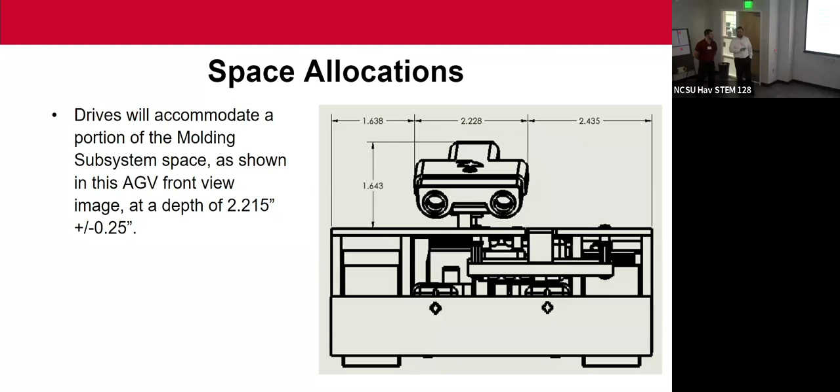Now that we've defined the space allocation, we'll go into the physical interfaces with the different subsystems. So with drives interfacing with mixing, we have the 4 holes located at these dimensioned points. The mixing subsystem will physically interface with the drive system using Lego connectors, so it'll be clipped into place, secured, but also easily removable if any servicing needs to be done.

I didn't really look that closely at this until Todd mentioned he was confused about what he would do. Just looking at it, how would I know those are my holes if I'm doing the mixing? Because you've got a ton of holes on there.

We put dimensions on those holes. That's what we were thinking would be enough to specify that those were the holes. We did not provide that. Are you saying you're confused on the drawing? Well, he was just saying, looking at it raw, coming in knowing nothing, he wouldn't know what he was supposed to do to interface.

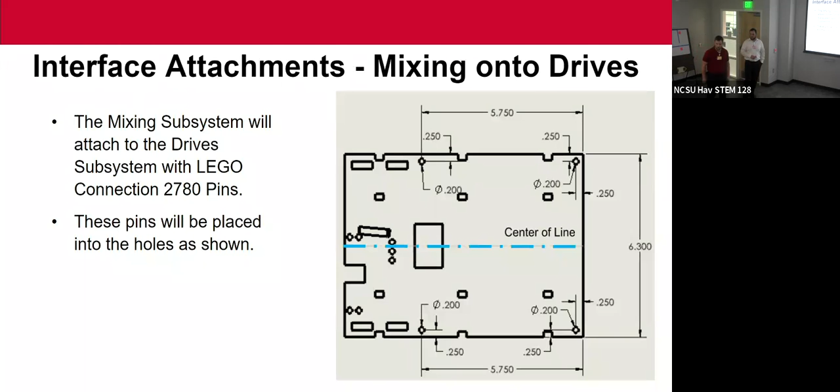One thing I don't recall, but the items going into those holes, how many individual pieces are there, or is it a set that's going to fit right in? 4 holes on this side. Okay.

So just so the 2780 defines the pin, I think it's just more like clarifying which holes they're mixing. You think about that guy back at your plant who's never been here, all he's seeing is this. He will probably need just a touch more to know, okay, those are your 4 holes. Like highlighting a certain color, would that be enough? Or would you just need to remove the rest of the holes and just have the 4 on there? A lot of different ways you can do it.

But you guys, obviously, have worked as one big team for most of the project. Imagine if you weren't, imagine if one of you was in France and the other one was in North Carolina. You wouldn't have had that communication, so everything goes down to how do you define the drawing and how do you know what part of the drawing is yours?

I think probably what you said, Les, is you just give that 4 holes subsystem what they need, your 4 holes and dimensions for your 4. We weren't really focusing crazy detail onto the drawings, as Dr. Pointing wanted us to focus more on the systems aspect. So I feel like we could just easily add in a flag name, or highlight it. Don't necessarily need to if it's basically a plug and play of a couple pieces.

Anything else? Okay, so we'll move on to molding, which I can see there may be the same issues with this. But molding uses these 2 slots on the right side, these 2 slots on the left side. As they showed in their subsystem, they have tabs on the bottom. Those go through the top plate for drives. They'll be secured with pins that go through their portion to lock their subsystem into those holes.

One more thing that I need to point out with this: the center line of the AGV, the blue line here, the center line that molding is using for their system with the molding cell, is going to be 1.93 inches off of the center of that. William will talk about that on the next slide. So I'll pass it on to Matt to talk about.

So for the interface alignment for mixing position, drives just needs to get the AGV in the mixing cell centered on that center line tape that we saw before, plus or minus the 1/4 inch tolerance. And they also need to back into the cell as we're located on the back side, and then just stop at the indicator mark with that 1/4 inch tolerance as well.

That's where we never thought to test. Add into our test, can you prove you're doing that? Any angular requirements built upon any angular requirements? It can be centered at one end and off on the other. So are you saying that the front and the back of the AGV has to be within 0.25 inches of the center of the mark, center of the line?

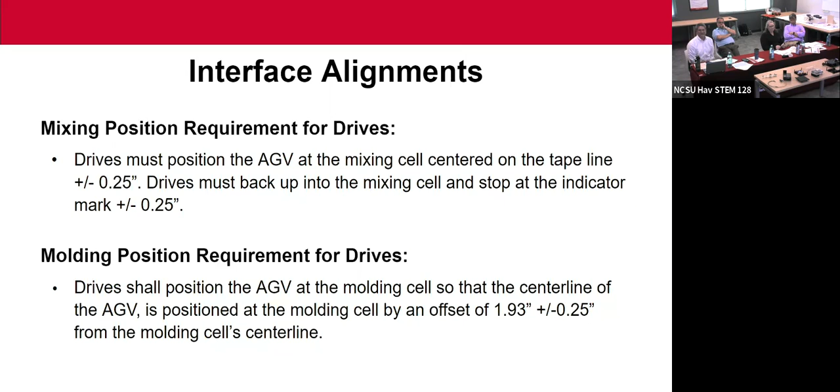Everything should work if you have the right tolerance specified. If it's 1.93, 1 and 15/16 plus or minus a quarter inch, there's your band. I might just bring them in a little bit, so it doesn't sound quite so wide.

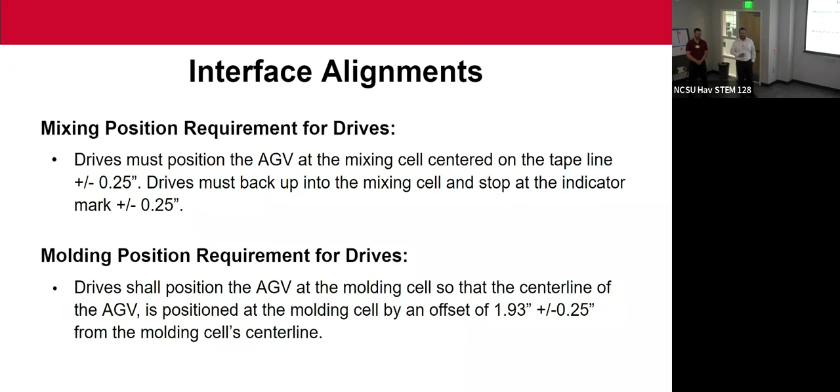Maybe we need tolerances on our tolerances. All right, is there anything else for this? I'm sure. In this case, we'll move on and I'll pass it back to our lead engineer assistant.

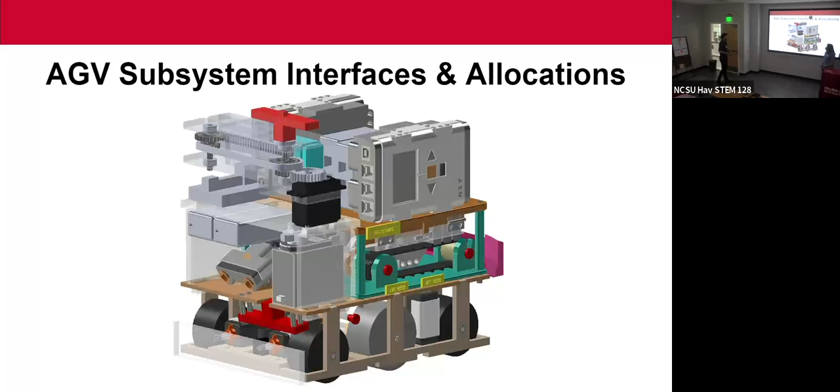I just wanted to cover one more thing with regards to the interfaces, which was our cable management plan. The mixing housing has the NXT bricks on top, and we were the driver for this design. In the ICD, we've got these two images: one is the bottom of our design and one is the top. The bottom shows this slot where the cables will come through, drive in this hole, come through the slot, and then feed up and through these two top holes. From those two top holes, they can go straight into the NXT bricks.

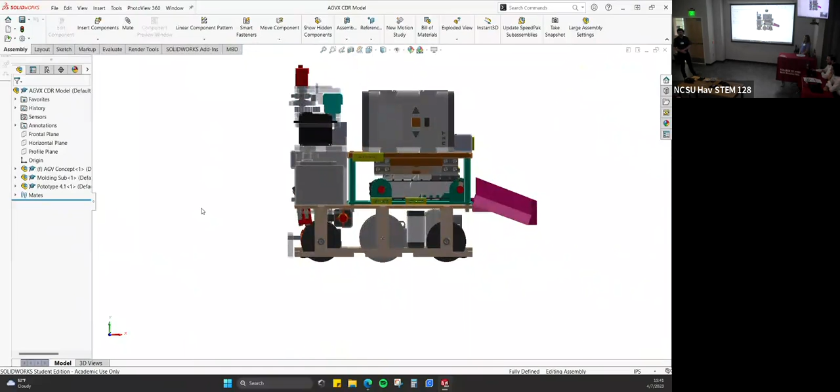Nicholas, if you would pull up the model real quick, I'll show where the cables will come through for molding. So as you can see, we've got the slot here, they'll feed up through and then can come to whichever NXT. And molding has this airspace here, so they're free to come straight across to the NXT bricks. Any questions with the cable management? Very good, thank you Nicholas.

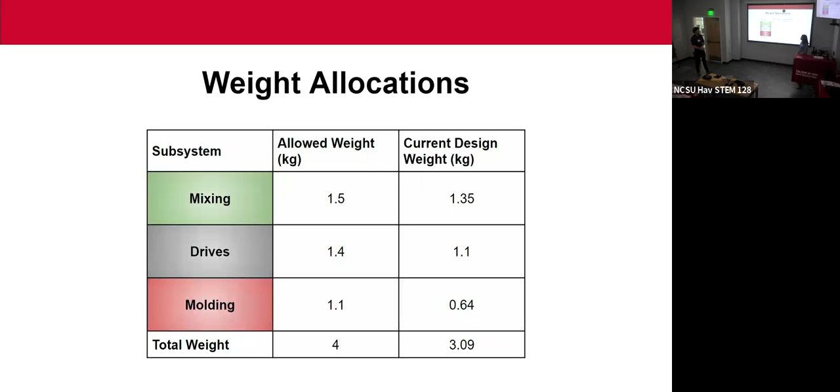This is just an overview of the weights. We mentioned these along the way, but we're showing you here that each allowed weight is still greater than our design weight, so we're underweight capacity for each subsystem. The time allocations we covered last time, we're still on track for those with our analysis of how long each task will take. Any questions on time or weight? Very good. Did you all have any questions overall?

Any thermal management considerations left hanging? We talked with Dr. Bortney about the thermal, and you said don't worry about it, do you not remember that conversation? Not even the least, I couldn't even remember the student that was in lab last week. I walked up and talked to you about it. Got it, so what's the concern? The NXTs or other components overheating, right? Yeah, that was the concern. And Gavin and I chatted with Dr. Bortney about it. I'm sure we did.

So again, I want to thank y'all for coming today. Just want to recap the project deliverables. Our last meeting was concept review, that was March 3rd, you gave us approval to come to today's critical design review. We are still currently on track and going to fulfill having a working demo device by May 3rd, along with our verification, testing, and data.

We know there were several concerns we needed to still address within some verification testing, but do we have your approval to move into manufacturing and production, provided that we make those changes? Yeah, I think in reality this will probably be a provisional approval, where you come back and demonstrate that you've got the 3-inch walls inside the cells. That's just logic. And then we're going to want those tests we talked about added for demonstration purposes, but you're not there yet, so as long as those get added, I think we'll be comfortable.